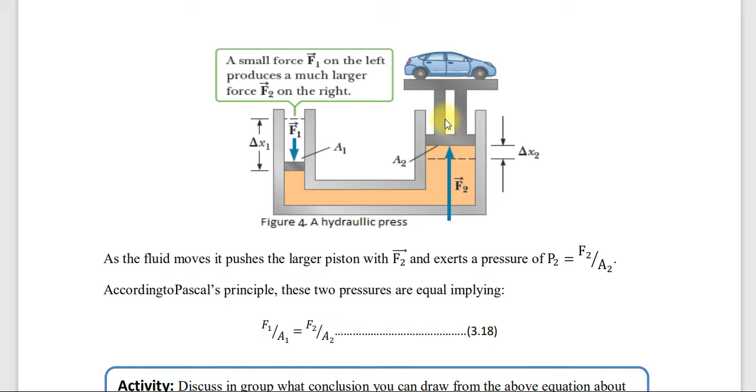Or simply, pressure 1 equals pressure 2: the pressure applied on this piston is equal to the pressure applied on the large piston. This is what Pascal's principle means.

For example, a small piston of a hydraulic lift has an area of 0.2 meter square. A car weighing 1.2 times 10 to the power of 4 Newton sits on the rack mounted on the large piston. The large piston has an area of 0.90 meter square. How large a force must be applied to the small piston to support the car?

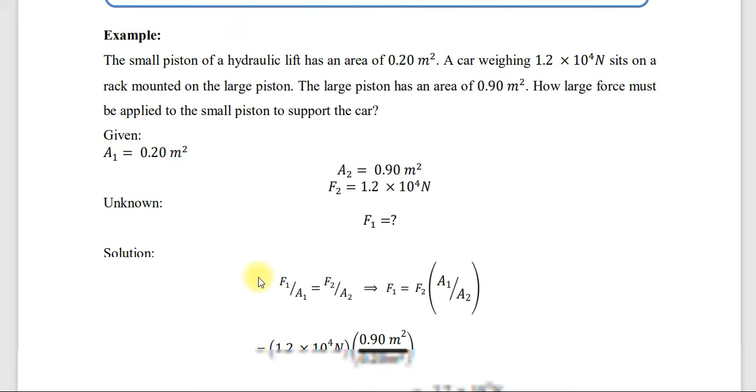So, apply Pascal's principle: F1 over A1 equals F2 over A2, which implies F1 equals F2 times A1 over A2. Substituting the given values: 1.2 times 10 to the power of 4 Newton times 0.9 over 0.2, which equals 2.7 times 10 raised to 3 Newton.

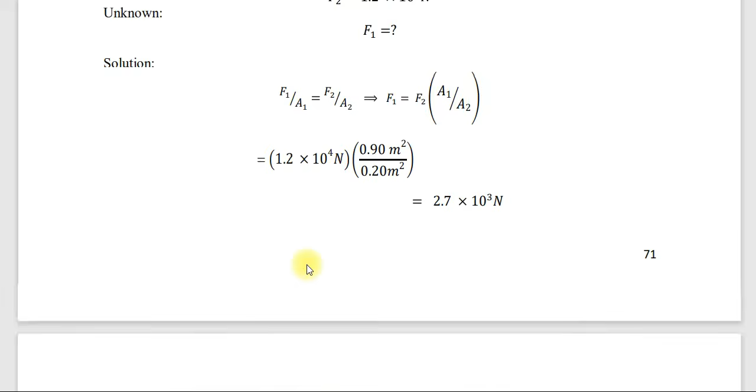The other principle is Archimedes' principle. It states that any object which is partially or totally submerged in a fluid or liquid has a buoyant force acting on it which pushes the object up. We also need to know what buoyant force is: when an object, most of the time in water, is placed in water, there is a force that pushes it up so it does not submerge, and that force is called buoyant force.

That is why a rock appears to weigh less when it is submerged in a liquid, and why it is very difficult to push a beach ball under water. If we weigh a rock in water and out of water, they don't match; when in water, its weight appears much smaller.

So the famous Greek mathematician Archimedes— I think he is even called the father of mathematics, simply.

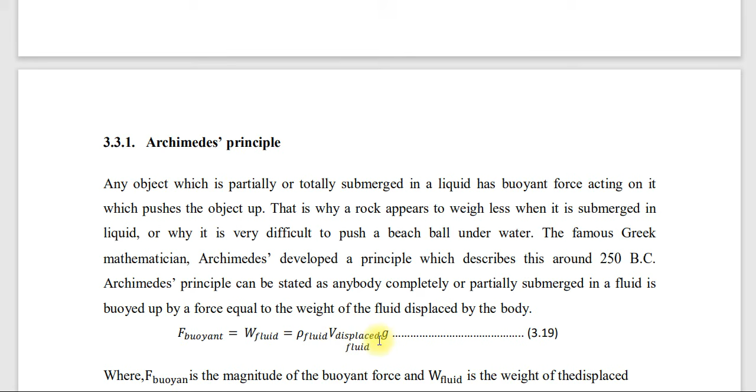The reason for this is that the pressure of the fluid is dependent on the depth of the fluid. So the pressure at the top of an object is less than the pressure at the bottom of the object, which creates a net force.

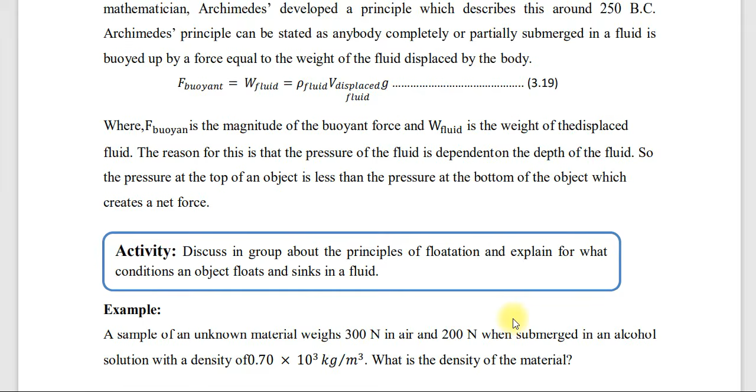A sample of an unknown material weighs 300 Newton in air and 200 Newton when submerged in an alcohol solution with a density of 0.7 times 10³ kilogram per meter cube. What is the density of the material?

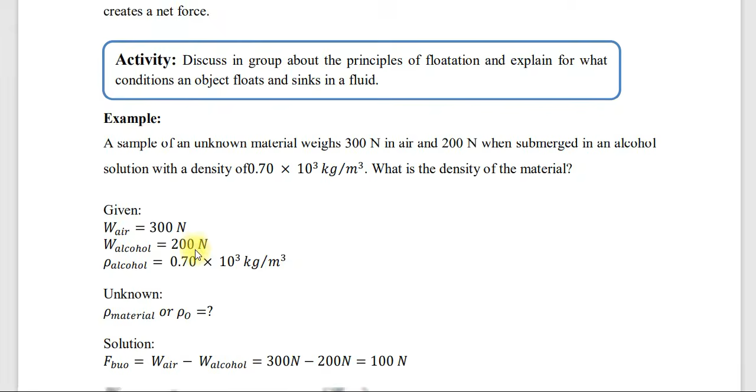So force of buoyancy which is equal to weight in air minus weight in alcohol.

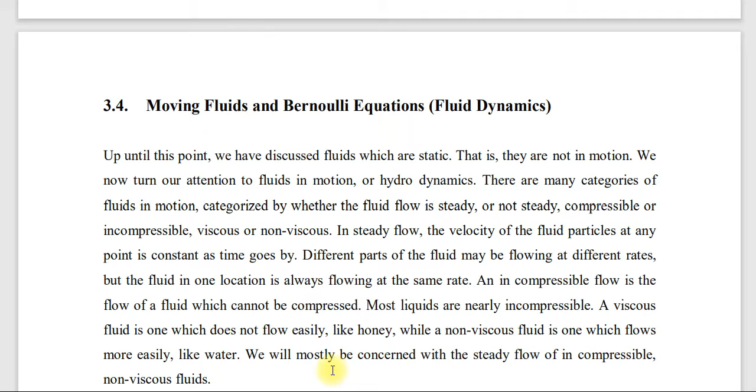በሌላ በኩል ደግሞ ስለ viscous እናወራ። viscous fluid is one which does not flow easily like honey, while non-viscous fluid is one which flow more easily like water። አሁን viscosity ስንል ወይም viscous ስንል ከቅጥነት ጋር ነው ወይም ከዝልግልግነት ጋር። ለምሳሌ ማርንና ውሃን ነው ያወዳደርን። ማር ምንድነው? ቪስከስ ፍሉድ ነው፣ በጣም ዝልግልግ ማለት በቀላሉ መፍሰስ አይችልም። ለምሳሌ ግሪስን መውሰድ ትችላላችሁ፣ ግሪስ አሁን ዝልግልግ ነው። ውሃን ብትወስዱ ግን ነን ቪስከስ ነው፣ ቀጭን ነው በጣም ቶሎ ነው የሚፈሰው። ስለዚህ ቪስካሲቲ ስንል ከዛ ጋር ማገናኘት ትችላላችሁ ማለት ነው። we will mostly be concerned with the steady flow of an incompressible non-viscous fluid.

ስለዚህ mostly concerned የምናደርገው ከምን ጋር ነው? concerned with a steady flow of an incompressible non-viscous fluid። ስለዚህ ምንድነው steady flow ነው፣ incompressible ነው እና non-viscous ስለሆነ ፍሉድ ነው ብዙ ጊዜ concern የምናደርገው ይለናል ማለት ነው።

if the flow is steady then the velocity of the fluid particle at any point is constant with time። አሁን steady ከሆነ velocity ምንድነው ብለናል? constant ነው at any point። the various layers of the fluid slide smoothly past each other, this is called a streamline or laminar flow እንላለን። laminar flow ሁለት አይነት ፍሎ አለ፣ laminar flow እና turbulent flow። ለምሳሌ የቧንቧ ኃይላችሁ ከሆነ በጣም ፓወርፉል ሲሆንና ዝቅተኛ የሆነ ፓወር ሲኖረው፣ ዝቅተኛ ፓወር ሲኖረው ስሙዝ የሆነ ፍሎ ነው ያለው፣ ድምጽ ራሱ የለው። ከፍተኛ የሆነ ፓወር ሲኖረው ግን የሆነ የሚራጨው ነገር አለ፣ ያ ምን ይባላል? turbulent ይባላል፣ turbulent flow። በጣም ስሙዝ ከሆነስ laminar flow እንለዋለን ማለት ነው።

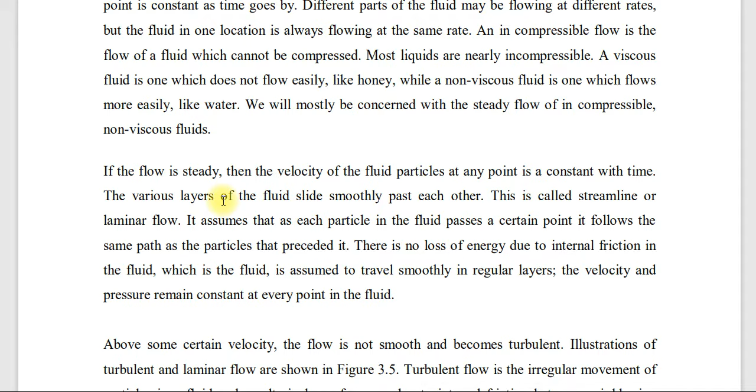ስለዚህ ይሄን ነገር ኮንሲደር እንድታረጉ ያስፈልጋል ማለት ነው። above some certain velocity the flow is not smooth and becomes turbulent። flow ምን አይነት flow ሊሆን ይችላል? ሁለት አይነት flow ሊሆን ይችላል፣ either turbulent or laminar flow ሊሆን ይችላል። turbulent flow is the irregular movement of particles in a fluid and results in a loss of energy due to internal friction between neighboring layers of the fluid, called viscosity። ስለዚህ turbulent ሲሆን energy lose ያደርጋል ምክንያቱም ከፍተኛ የሆነ friction አለ between that fluid ማለት ነው። እንደነገርኳችሁ ውሃ ለምሳሌ ከፍተኛ የሆነ ፓወር ሲኖረው ድምጹን ላሳይቀር ያወጣል።

በዛ ጊዜ ምን ያደርገ ነው? energy lose ያደረገ ነው because internal የሆነ friction ስላለ ማለት ነው። there is a disruption to the layers of the fluid, the speed of the fluid at any point is continuously changing both in magnitude and direction። አሁን በዚህ ጊዜ በቱርቡላንት ጊዜ ምን ይሆናል? የስፒዱ ይቀያየራል፣ እንደውም ካያችሁ ተሆነ የሆነ ቱፍ የሚል ነገር አለ። ለምሳሌ የቧንቧ ነው ከፍተኛ የሆነ ፓወር ሲኖረው ቱፍ የሚል ነገር ይመጣል፣ ያቋርጣል ምናምን ነገር። ያ ማለት ቬሎሲቲ ወይም ስፒዱ ኮንቲኒዩስሊ ቼንጅ እያደረገ ነው ማለት ነው።

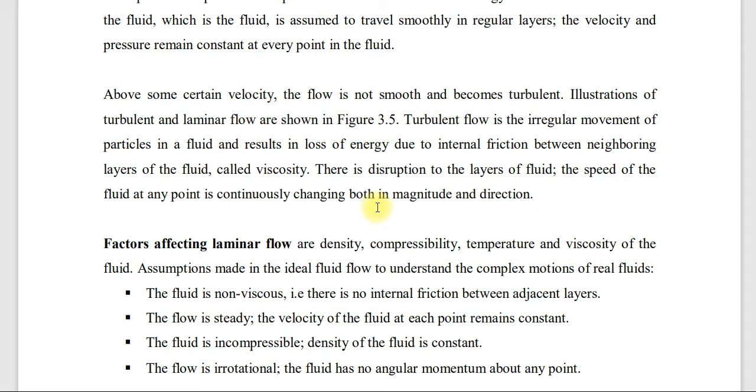so በዚህ way እንድትረዱልኝ እፈልጋለሁ ማለት ነው። here factor affecting laminar flow ምንድናቸው? ለምሳሌ density, compressibility, temperature, viscosity of the fluid, those are the factors that affect laminar flow። ለምሳሌ በጥያቄ ፎርም what are the factors that affect laminar flow ተብሎ ሊጠየቅ ይችላል፣ እናንተ ማን ትላላችሁ density, compressibility, temperature and viscosity ብላችሁ ልትመልሱ ትችላላችሁ ማለት ነው።

assumptions made in the ideal fluid flow to understand the complex motion of real fluid, what are the assumptions? የመጀመሪያው the fluid is non-viscous, there is no internal friction between adjacent layers። non-viscous ከሆነ adjacent layer ላይ friction የለም ብለን እንወስዳለን። ሁለተኛ the flow is steady ማለት ነው፣ the velocity of the fluid at each point remains constant or the same። ሶስተኛ the fluid is incompressible, density of the fluid is constant። incompressible ከሆነ density ምንድነው? constant ነው ማለት ነው።

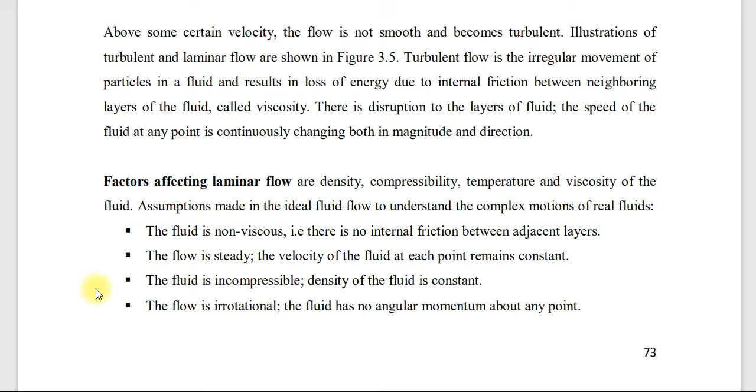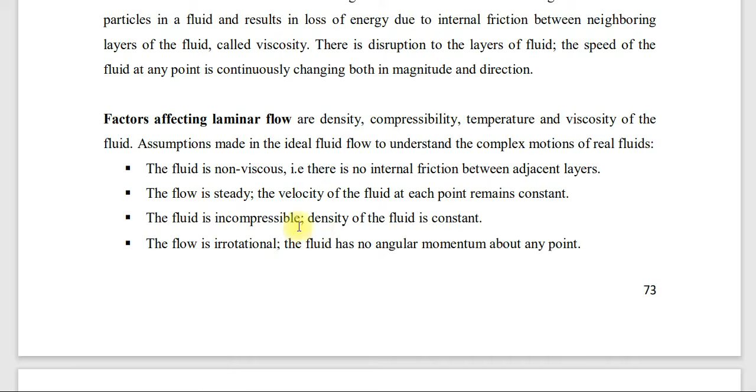መጨረሻ ላይ the flow is irrotational፣ ያ ምን ማለት ነው? the fluid has no angular momentum about any point እንደማለት ነው። ስለዚህ እነዚህን assumptions መያዝ ያስፈልጋል ማለት ነው፣ ምን ለማለት ነው? እነዚህ ነገሮች ፍሉዱ አይዲያል ፍሉድ ነው ለማለት እነዛ አሳምፕሽኖች ያስፈልጋሉ ማለት ነው። or simply what are the assumptions for the fluid to be an ideal flow ብንል እነዚህን መዘርዘር ነው።

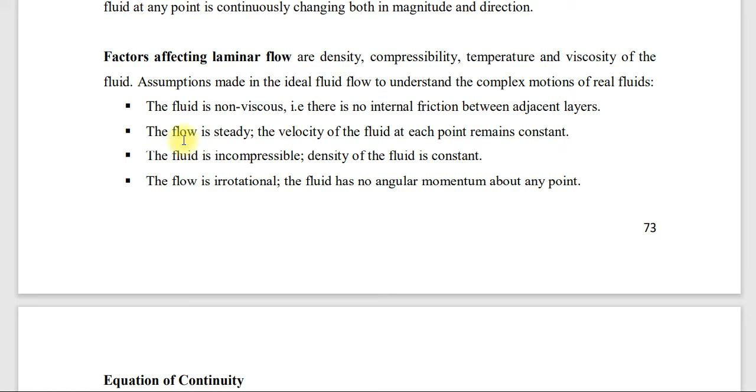ኦኬ ሌላኛው ደግሞ equation of continuity የሚል ነገር አለን። equation of continuity express conservation of mass for an incompressible fluid flowing in a tube።

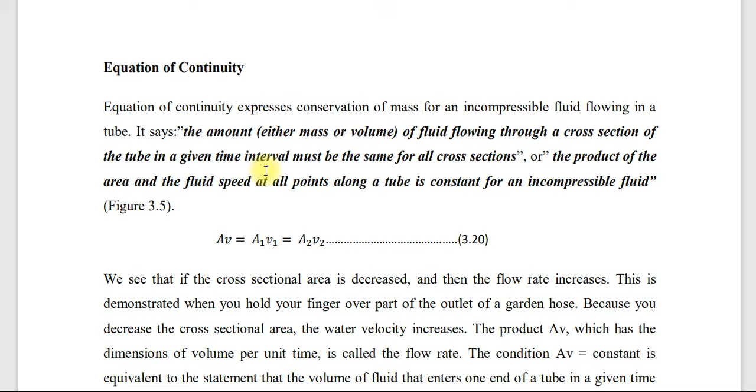It says, the amount - either mass or volume - of a fluid flowing through a cross section of a tube in a given time interval must be the same for all cross sections. In other words, the product of the area and the fluid speed at all points along a tube is constant for incompressible fluid. Mathematically this is expressed as AV which is equal to A1V1 which is equal to A2V2. This is called the equation of continuity.

We see that if the cross-sectional area decreases, the flow rate increases. If cross-sectional area decreases, what does flow rate do? It increases.

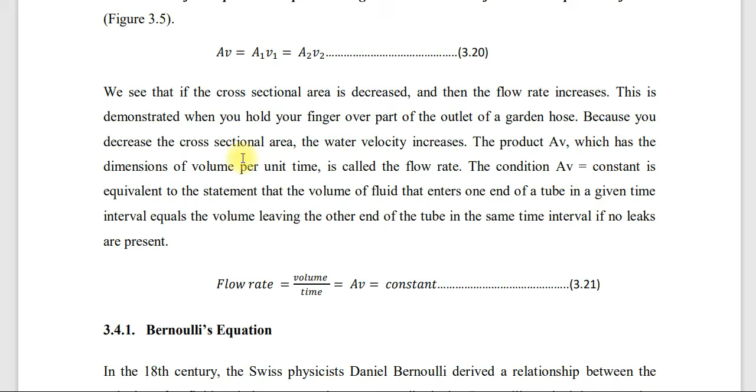In the 18th century, the Swiss physicist Daniel Bernoulli derived a relationship between the velocity of the fluid and the pressure it exerts. So what did Bernoulli do? He related pressure and fluid speed, or velocity - pressure and velocity.

Qualitatively, Bernoulli's principle states that swiftly moving fluids exert less pressure than slowly moving fluid.

Bernoulli's principle is extremely important in our day-to-day activity or in our everyday life. It is the primary principle which leads to lift on an airplane wing and allows the plane to fly. If you take an airplane wing, there is something moving at its edge - rising up and lowering down - and that works based on Bernoulli's principle.

It is the primary reason a sailboat can sail into the wind. It is the primary reason a baseball can curve. It is an important reason that smoke is drawn up a chimney.

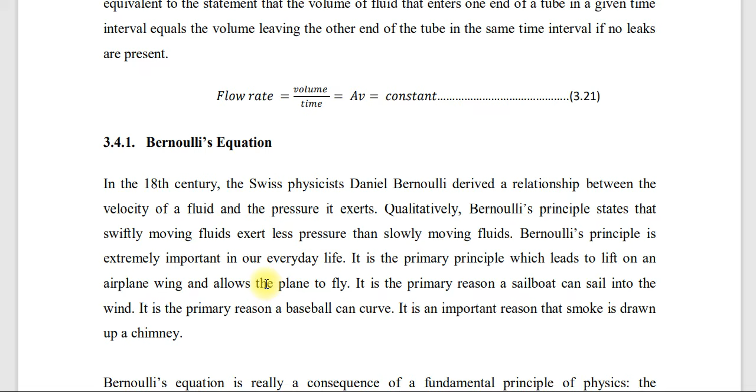So it is derived by using the energy principle. Consider a fluid moving through a pipe - let's say a fluid is moving through some kind of pipe. The pipe's cross sectional area changes and the pipe changes elevation.

At one point of the pipe, it has a cross sectional area A1, height Y1, and pressure P1, a velocity of V1, and it moves a distance of change in x1 in time change in t.

At another point P2 along the pipe, the quantities are given by A2, Y2, P2, V2 and change in x2. Look at the givens: area, height, pressure, speed, and change in x are given. So conservation of energy gives the following equation called Bernoulli's equation: P plus 1 over 2 rho v squared plus rho g y, which is equal to constant.

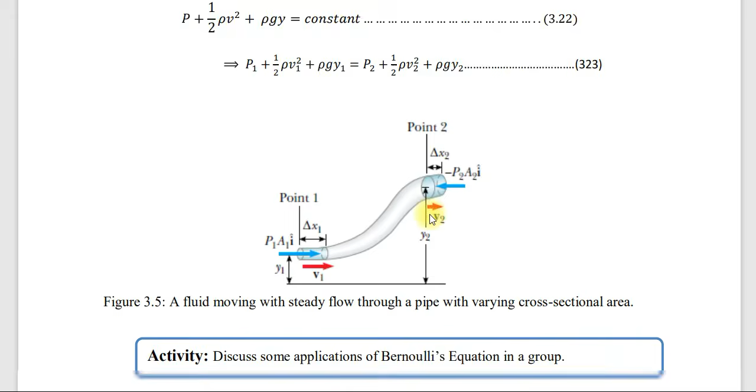For example, water circulates throughout a house in a hot water heating system. If the water is pumped at a speed of 0.5 meters per second through a 4 cm diameter pipe in a basement under a pressure of 3.03 times 10 to the 5 Pascal, what will be the velocity and pressure in a 2.6 cm diameter pipe on the second floor, 5 meters above? Look, different data has been given to us.

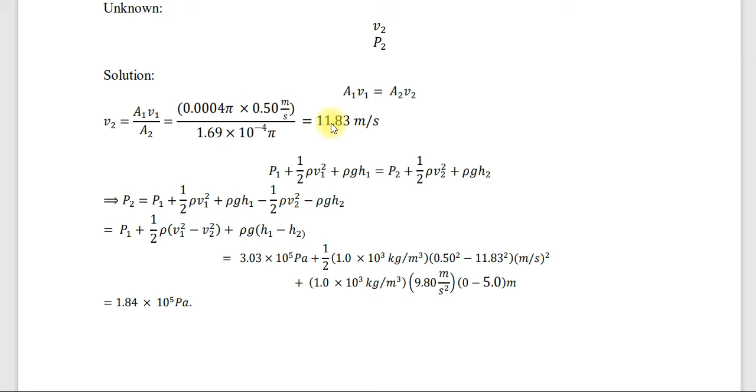Now let's review today's class overall and finish the chapter summary. We have seen that we can describe the elastic property of a substance using the concept of stress and strain. Stress is a quantity proportional to the force producing a deformation, and strain is a measure of the degree of deformation. Strain is proportional to stress, and the constant of proportionality is the elastic modulus.

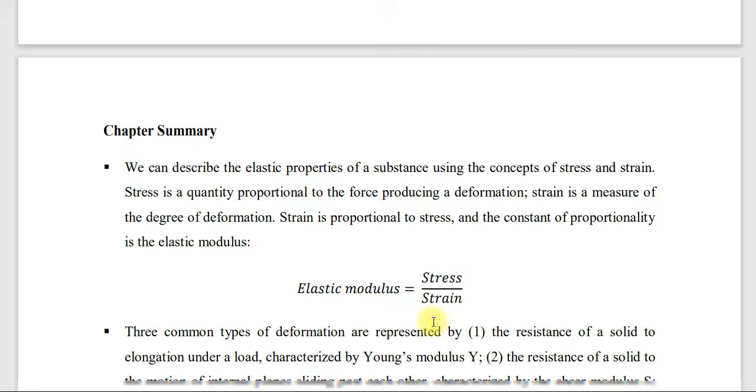There are about 3 elastic moduli: we have seen Young's modulus, bulk modulus, and shear modulus. So elastic modulus, in short, is stress over strain. Three common types of deformation are represented by...

The resistance of the solid to elongate under load is characterized by Young's modulus, Y. Second, the resistance of the solid to the motion of internal planes sliding past each other is characterized by shear modulus, S. The third is the resistance of the solid or fluid to a volume change, characterized by bulk modulus.

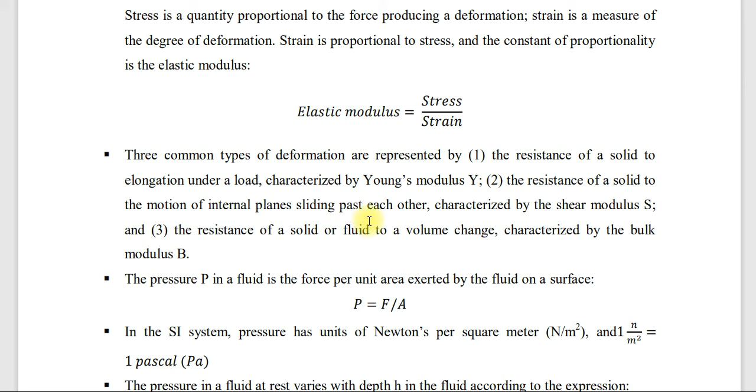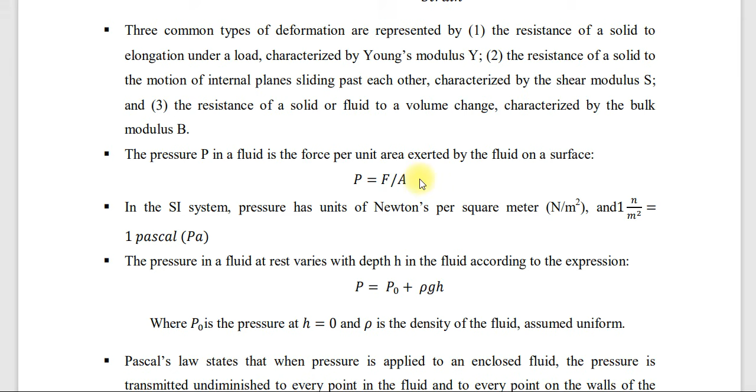The pressure P in the fluid is the force per unit area exerted by a fluid on the surface, which is pressure equal to force over area. In the SI system, pressure has a unit of newton per square meter, which is equal to Pascal.

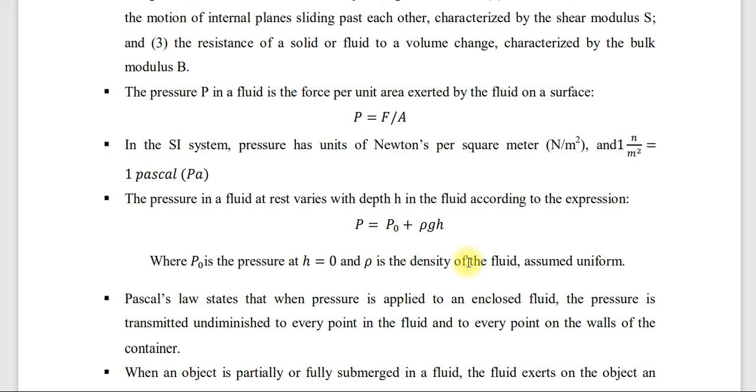The pressure in a fluid at rest varies with the depth h in the fluid according to the expression P equals P naught plus rho g h, where P naught is the pressure at h equal to 0, and rho is the density of the fluid.

Pascal's law states that when pressure is applied to an enclosed fluid, the pressure is transmitted undiminished to every point in the fluid and to every point on the wall of the container.

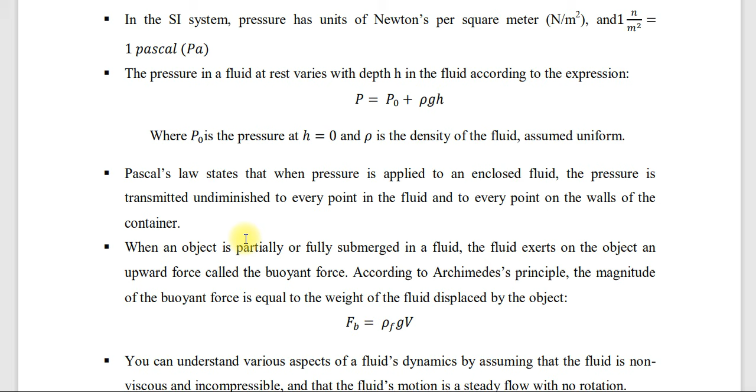This is an extremely important application of Pascal's principle, such as the hydraulic press. When an object is partially or fully submerged in a fluid, the fluid exerts on the object an upward force which is called buoyant force.

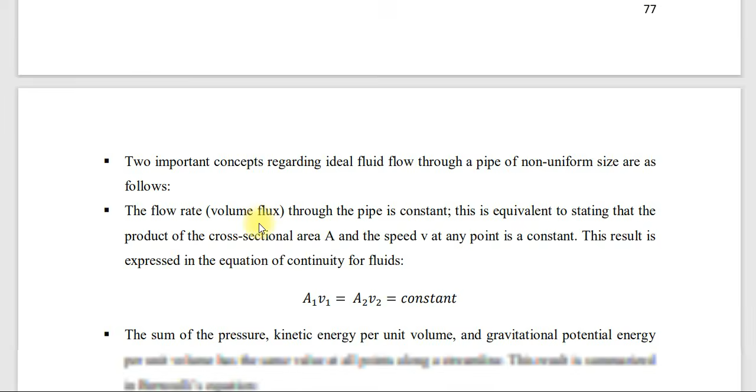The flow rate, or volume flux, through the pipe is constant. This is equivalent to stating that the product of the cross-sectional area and the speed v at any point is constant. This result is expressed in the equation of continuity for the fluid, or continuity equation.

A1 V1, that is area 1 times velocity 1, equals area 2 times V2, which equals a constant, as we derived. And the sum of pressure, kinetic energy, and...

...kinetic energy per unit volume, the gravitational potential energy per unit volume has the same value at all points along the streamline. This result is summarized by Bernoulli's equation.